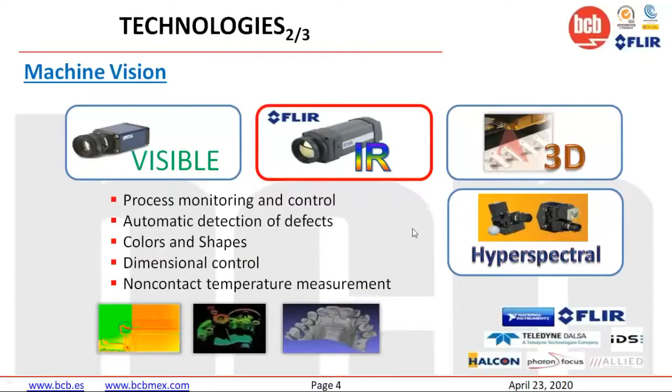Regarding artificial intelligence and big data, these are technologies we work with. We work on self-learning machine vision based on historical data. We can identify complex patterns within volumes of data for precise prediction of defects and for automatic self-adjustment of parameters, and we can extract information which is very valuable both for process optimization and product optimization.

Further to being a dealer of FLIR cameras and experts in thermography, we develop our own software solutions. We use National Instruments tools both for industry and research, and our platform is the BCB Monitor.

Here we integrate a miscellaneous, multiple combination of thermographic sensors, image management software, and other additional elements, so we can offer a complete monitoring solution, which is usually customized according to the specific needs of the customer's processes.

Also, we have a variant, the BCB Research, for research and development, with some additional capabilities than the one dedicated to industry and medical applications.

We work in three main sectors. One is automation and industry, and the second one is research and development, where we are quite active in European and national calls. The third one is thermosolar power plants, where we have over 10 years of experience.

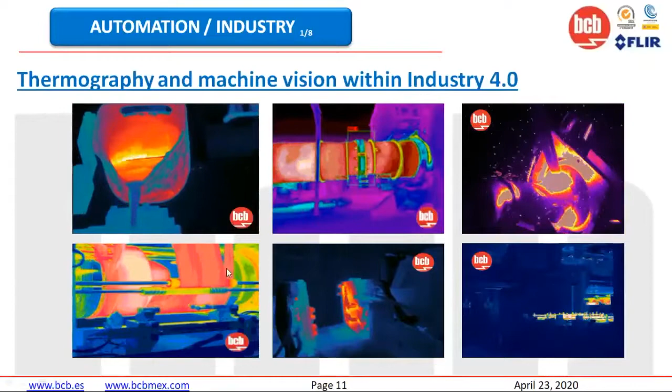Regarding thermography and machine vision within Industry 4.0, thermography is quite a transversal tool for many industrial sectors. We can see here some examples for aluminum casting, rotating furnaces, welding, production of paper, rubber, die casting, or hot stamping. Also electronics - we can perform thermographic analysis of components, printed circuit boards, LEDs.

We can monitor critical equipment or electrical substations, and we can also work on process monitoring in many industries, for example in the steel, foundry, or automotive industries.

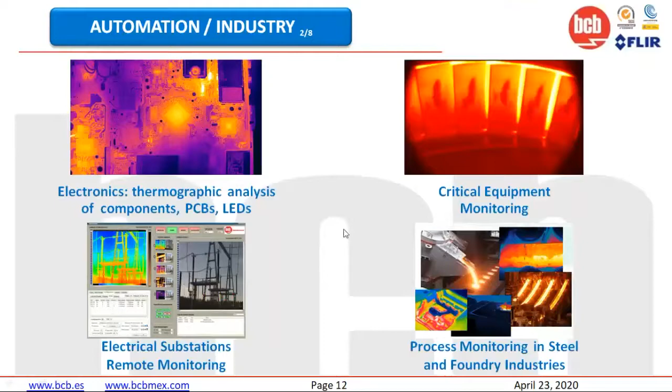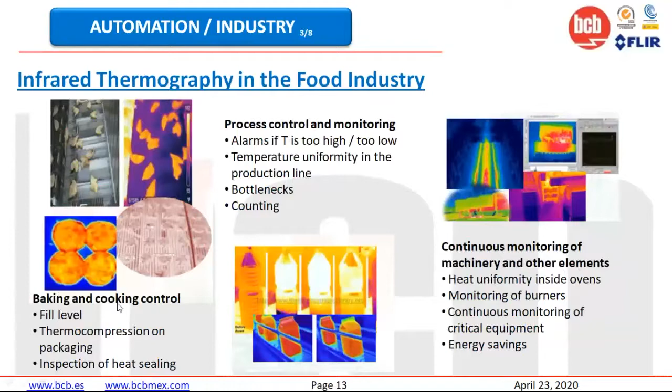These are some examples of applications of infrared thermography in the food industry. We can do continuous monitoring of critical elements, machinery and other elements, and also control the consistent quality of the product, of the process, and work on predictive maintenance of the production machinery.

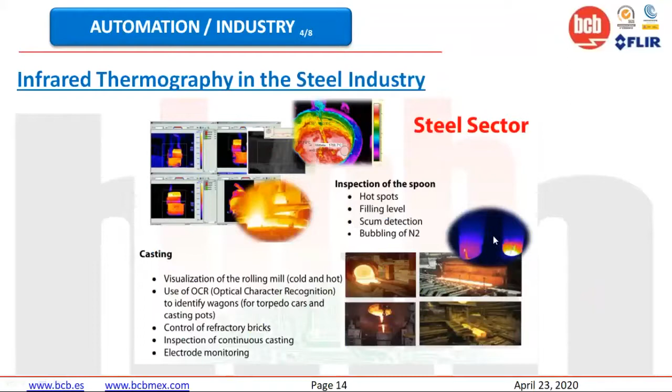Regarding the steel sector, we can, for example, predict the wear of the refractory bricks, inspection in continuous casting, or the wear of the electrodes in an arc furnace, among other applications.

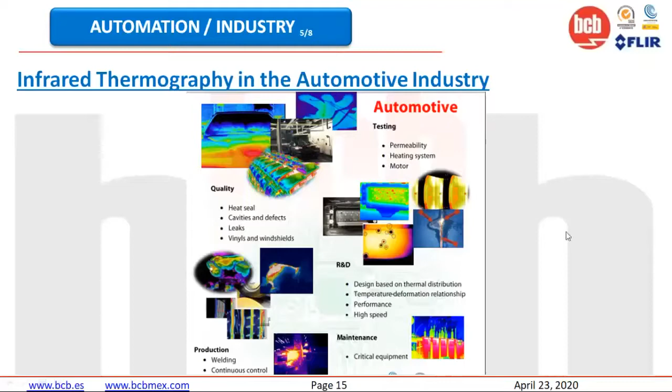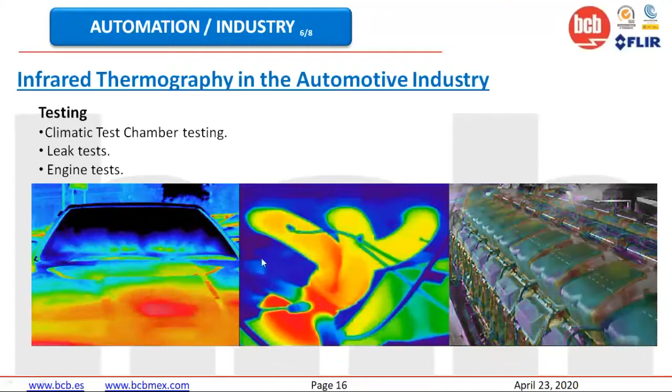In the automotive industry, we have also a number of applications that incorporate machine learning and artificial intelligence, both for quality testing, production, maintenance, and research and development. Here we have, for example, some examples of testing, leak tests, or engine and engine component tests.

And also regarding predictive maintenance, there are some applications of electrical maintenance and mechanical supervision.

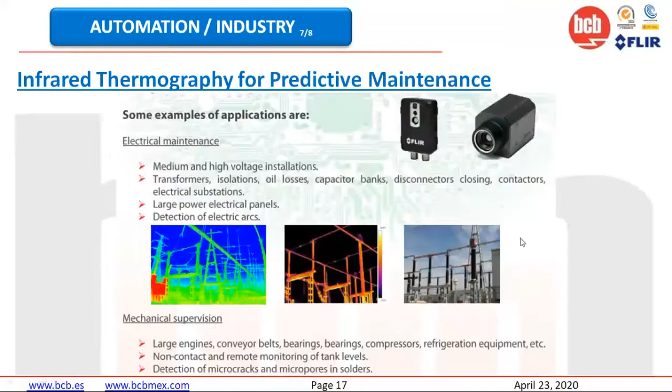And we can use this stored information, retrieve it later for further study and to learn patterns. Or we can, for example, record an image of a process. If you have a thermographic camera, which is a more advanced variant of the thermal camera, we can say that we have, in reality, thousands of virtual thermocouples in this case.

So if we want to retrieve a radiometric image from some weeks, months, or years back in time, we can access the recorded images and move the regions of interest, the areas that we want to study. Maybe we suspect there is a failure in some case, so we can make a historical graph of the thermal evolution in that area, to see what happened, or if there are any areas of the process or product that can be affected, for example, by a quality issue.

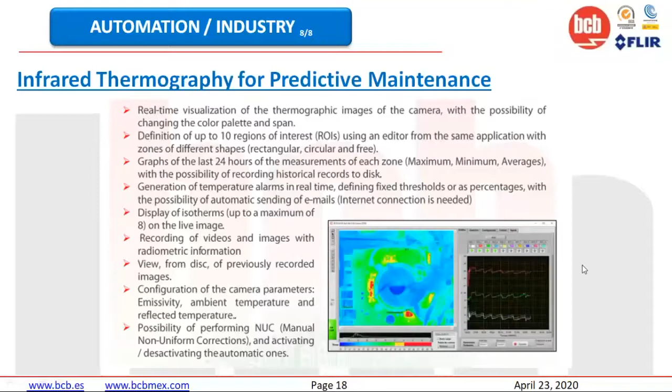If you have a field of heliostats pointing to a specific area in the tower, you can imagine what will happen if the energy is not pointing in the right direction — we are just wasting energy. But if this energy is pointed to the tower, but to the structure of the tower, we can destroy the tower.

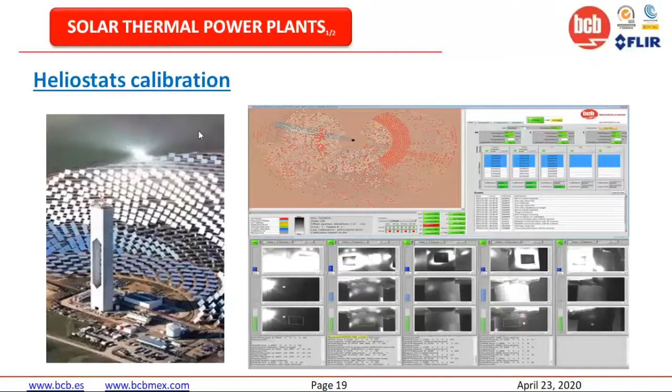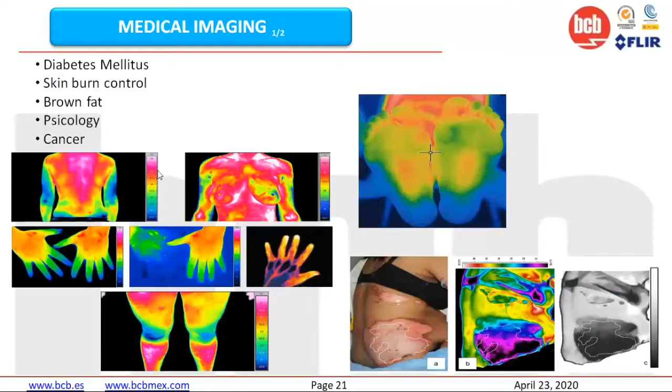So it is very important to have this calibrated, and we also use our specific software and algorithms to perform this very special application. These are some examples in CSP solar thermal power plants: detection of salts, automatic inspection of tubes and tanks, and some applications in medical imaging — diabetes, skin burns, brown fat, psychology, or cancer.

And we also have, as I mentioned, our specific BCB TempScan software for the monitoring of elevated body temperature. You will see there is a lot of noise in the media regarding this application, but nobody is clear about the specific characteristics that a camera or a system for this very special application must meet.

There are specific regulations, ISO and IEC, that many suppliers in the media don't meet. So we have developed, together with FLIR cameras approved by the American FDA, the best in the market, and we also apply our BCB TempScan software.

And just so everybody can learn a little bit — you have seen what we are doing in BCB — now we'll finish with just some recommendations: five steps for building and deploying deep learning neural networks.

You know that deep learning is a small part of artificial intelligence, machine learning, or representation learning. So we can say it is more advanced than other components in the artificial intelligence landscape.

Some advantages of deep learning neural networks applied to thermography: we can replace millions of lines of code with a simple neural network. We have to train the neural network, of course, with images, and we need very little coding. There are a lot of tutorials that are easy to find, and there are many opportunities for your machine vision systems to do things that were previously unimaginable some years ago.